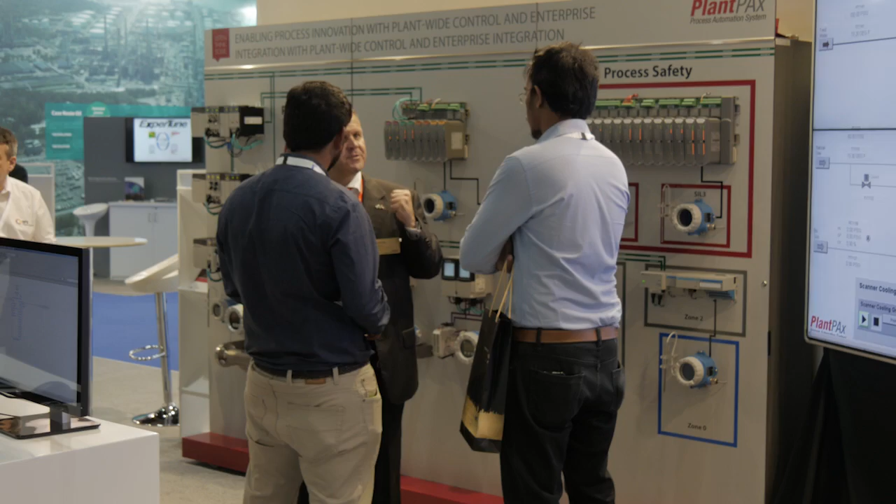The reason that we're here is because we have world-leading control and safety solution products integrated into solutions to deliver to the oil and gas base across the Middle East. What I'd like to talk about very briefly is our solutions capability using Rockwell Automation's products and services.

If we look through a typical project life cycle, every project starts with a concept, an initial specification, front-end engineering design, and then through to traditional systems delivery that Rockwell Automation are very well known for. The thing that Rockwell Automation can do is we can add genuine value to the whole engineering life cycle, right from initial specification through to front-end engineering, to help get the specifications correct to deliver solid, reliable control and safety system solutions to meet our customers' requirements.

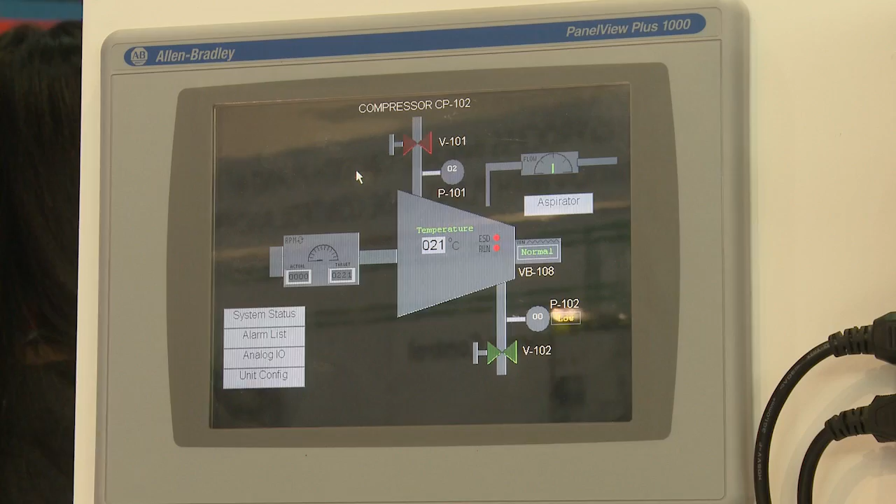On the show today, we're showing the AADvance safety process product. It's been shown as an application on a compressor, and it's been configured as a SIL3 fail-safe configuration, and it's showing an element of control on the compressor where we've got speed and flow of the fuel, with all the emergency shutdown systems being triggered in if anything goes wrong.

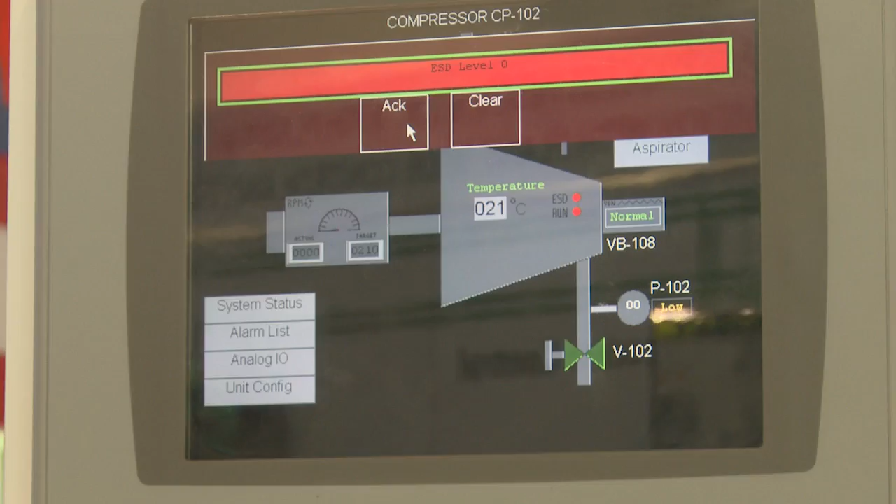Now, the Trusted product, as you'll see, is a larger footprint product. It has a good IO density level, but it is designed as functional safety level SIL3, actually the highest safety level that you can get in the oil and gas industry typically. And its key design feature is that it operates in a triple modular redundant mode, so it has both availability and reliability of application.

It has features such as hot swappable I/O modules, so if you do get a failure, then you can repair any I/O module in the field without having to shut your plant down. And those are some of the things that really make this product a class-leading triple modular redundant system. But it also talks over a high-integrity communications network to AADvance, James.

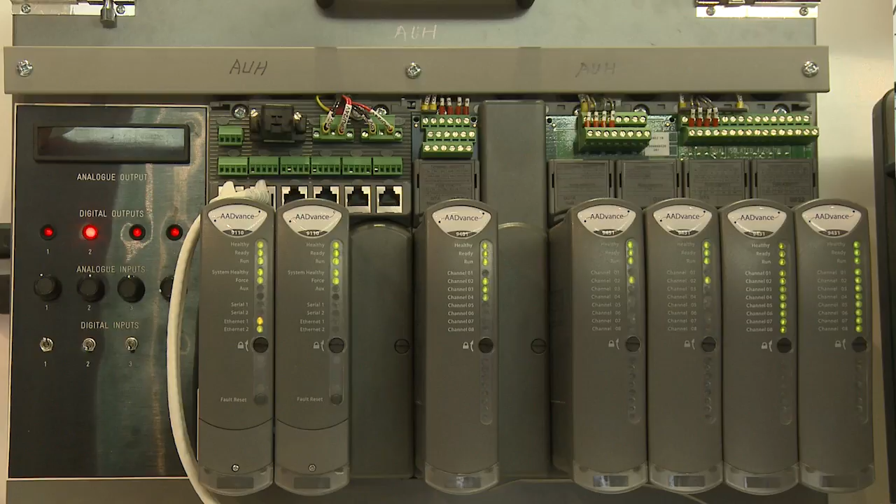AADvance is a scalable design system. It is able to be configured for safety integrity level 1 up to safety integrity level 3. So we have the flexibility here to put in additional modules to get the triplicated module redundant configuration, and in this particular one we're showing it on a gas compressor application where there's integrated control and the emergency shutdown safety.

Here we're showing two processors. It's designed as a SIL3, but fault tolerance can only be achieved if we put a third processor. So this one is configured as fail-safe. If a module had to fail, the remaining processor would take the actions and shut down safely. That's really the configuration difference. And on this here, we're showing the parameter setups that we have on the display, the HMI, where we're showing integrated.

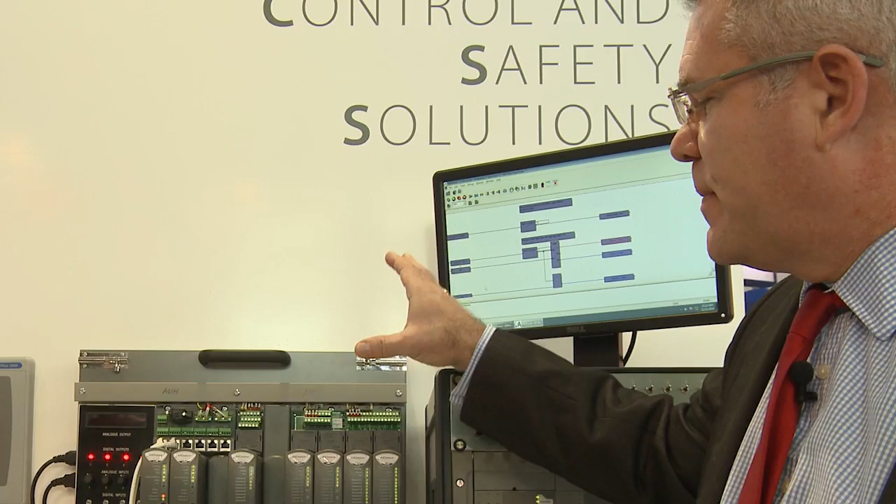We can show the RPM, and I can adjust these, and we can see this in the compressor coding that we have on the processor. So I can see that the target RPM has been monitored and it's been tracked. And if I can adjust it, we can see it all going up, including what is the flow. We can show temperature. The AADvance is working in a high availability process control configuration, if you will, with the

functional safety elements. And going back to Trusted, Trusted is designed around, for example, large fire and gas system applications on large offshore platforms or onshore installations and emergency shutdown applications. So this is where this really comes into its fore, whereas the AADvance, as James has said, it's scalable in its functional safety capability from SIL 1, which is the least rigorous level of functional safety, as James said, up

to SIL 3. Now, clearly what we can do with these is we can distribute these around the plant, which does give you some local cable connectivity advantages, and then you are able to network the safety elements across the systems up to the Trusted, if that's the application that you have. So I think in closing, we have good, scalable, flexible, large and small integrated control and safety solutions products to meet the oil and gas industry needs.

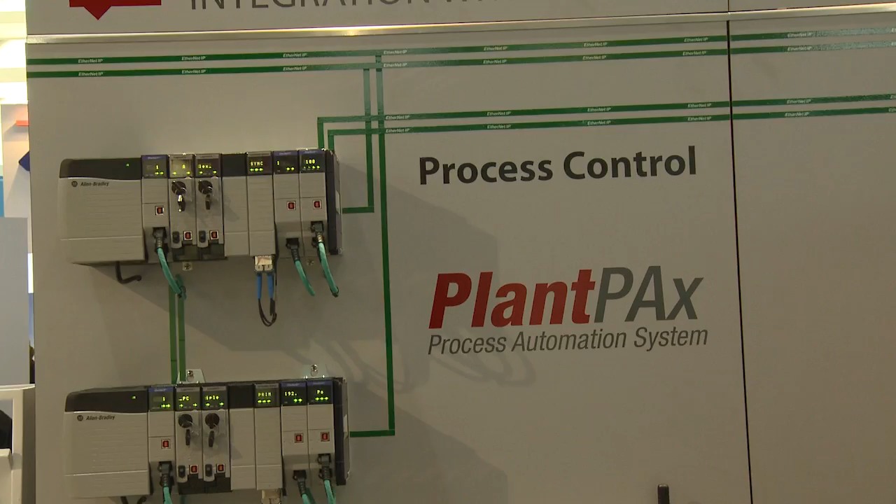I'm here with Gert Thoonen, and we're going to talk a little bit about our PlantPAx system, our DCS, the modern DCS. Here, for example, you have simplex I/O ControlLogix-based systems with representative field I/O. You have high availability I/O using our 1715 I/O series, and then further moving over, we have our process safety solution, the AADvance, which we talked a little bit about elsewhere in this discussion.

Here we are showing our redundant ControlLogix, our basic process control system. We can have it as a duplex or a simplex controller. We can make it in the system like we want to have. And below we are integrating all our field devices, the eyes of our installations in the field. So like everybody knows, the good old 4-20 milliamps, what is HART connection. Modern devices, they're going already on EtherNet/IP because we get a lot of information from them. WirelessHART, the newer technologies. Foundation Fieldbus, what is mostly used in our oil fields today.

When we're talking about the PlantPAx solution, the products that we have here, these are products that can be embedded into unit control panels and panels that are supplied by third parties. So when we're actually supplying an integrated control and safety solution, we're actually looking at an ICSS that can extend beyond our traditional scope of supply right into the packages, and the connectivity, because it's all Rockwell products, makes itself a distinct advantage to the end users.

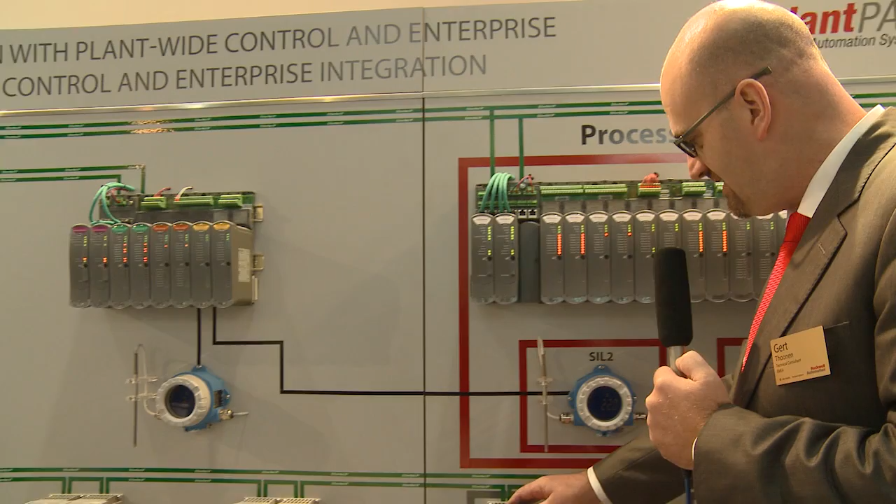Yes, I fully agree with that. The nice thing about this PlantPAx solution is that it is fully integrated. We can integrate the smaller skids and select the right controller to integrate everything and get all the information in one single system. So if we go on here on the wall, we see also the integration of frequency drives in our system, and as we can see, everything is connected on a ring network, an EtherNet/IP, so that makes it easy. Everybody understands the Ethernet. We need only one single network to connect everything in a secure way.

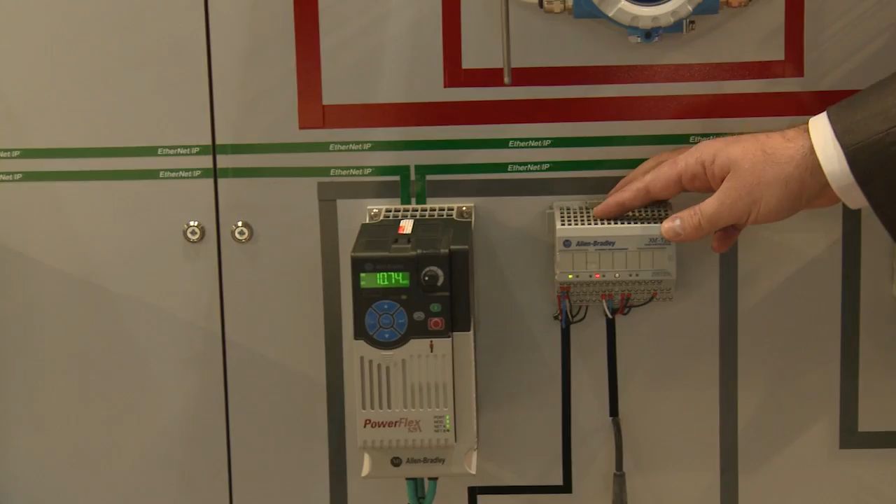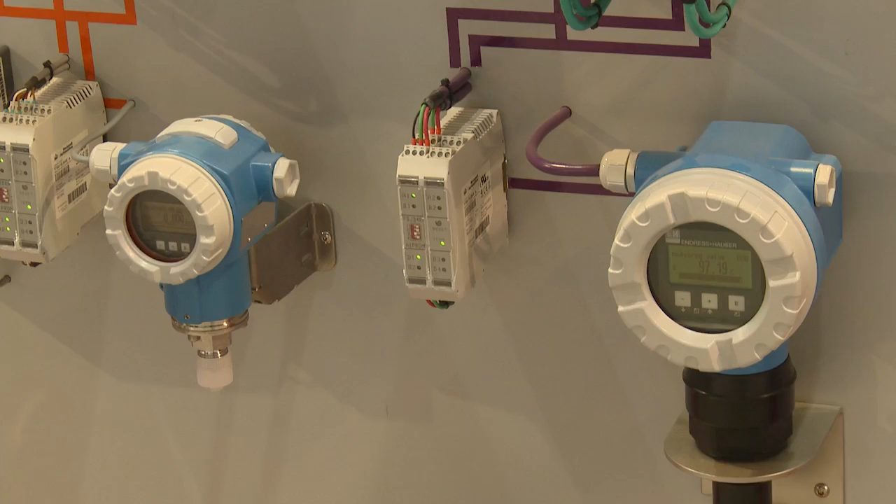And of course, when we start to talk about pumps and big fans, we need to be able to do vibration monitoring, and with our system we can bring the vibration monitoring modules near to our end device and pump the data up to our integrated system to get all the information. In our oil fields we get hazardous areas, so we go intrinsically safe to reduce the power in the field, so that there are no sparks coming up. And as top of the range, our standalone safety integrated system that works completely separately, but will give all the information to the basic process control system and acts as one platform to get all the information.

Our clients demand that the safety elements are segregated, functionally segregated from the control piece. This then meets with the industry standards and industry requirements, maintains segregation, but also importantly maintains the overall integration for the information that is available to the operators, and also in the programming environment as well, in the engineering workstation

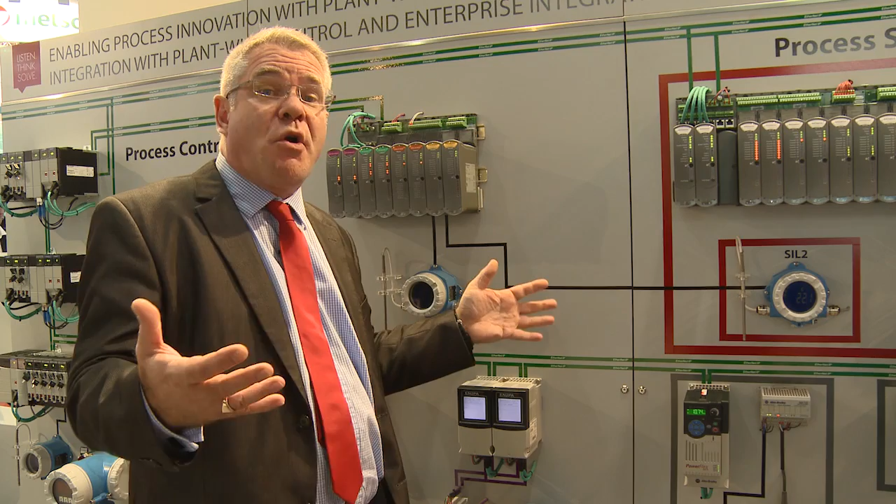environment. The data is going up to our operator, to our control center, and also from the basic controller everything is going up to get it in one single place and get the information in one single screen. What is very important is that we can make the right decisions about what is going on in the plant.

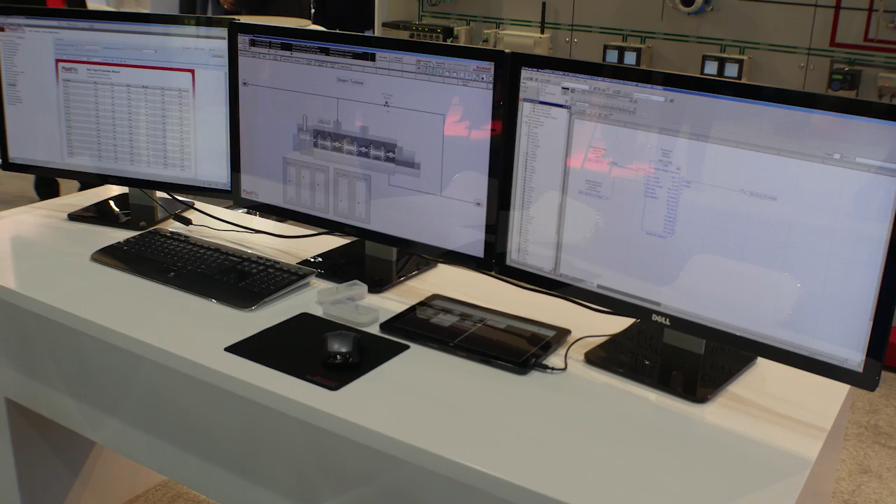Welcome to my control room. As you can see, we are jumping here into our oil and gas field processing. Our PlantPAx is the modern DCS system that is using all modern technologies like virtualization, integrated safety and network security as a standard best practice in our solution.

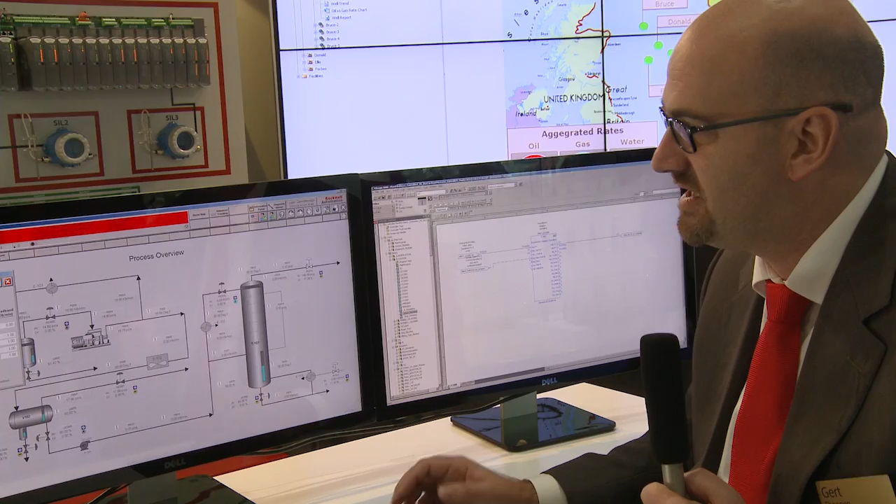PlantPAx is easy to integrate because it has a full range and extensive library with a lot of integration in faceplates, like we can see here on this screen. This is coming from our basic process controller, and it gives all the information for the operator, for the maintenance guy, where he can configure his alarming. The engineering department can configure everything in one single screen to get it up and running.

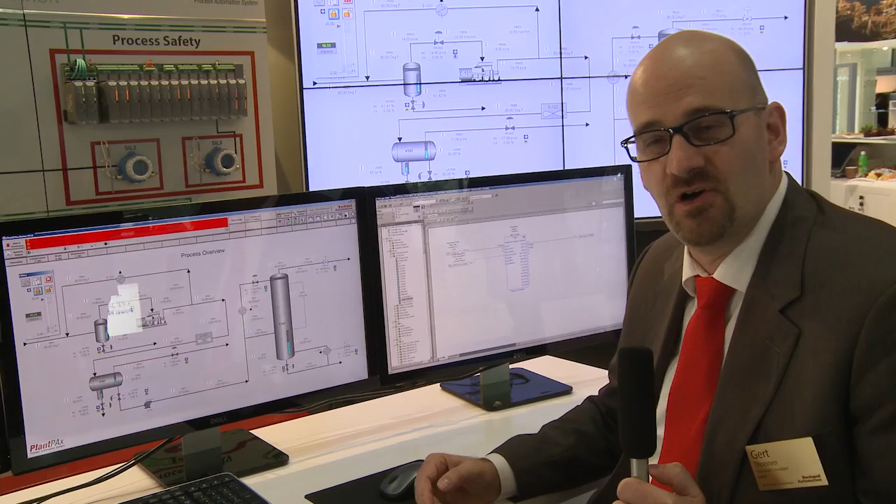But as we said before, the safety system is also fully integrated and has the same look and feel. Here you can see the little eye to tell you that it is coming from the safety part. But the most important thing is that we also get all the information in our reporting system, and in PlantPAx that is very easily done.

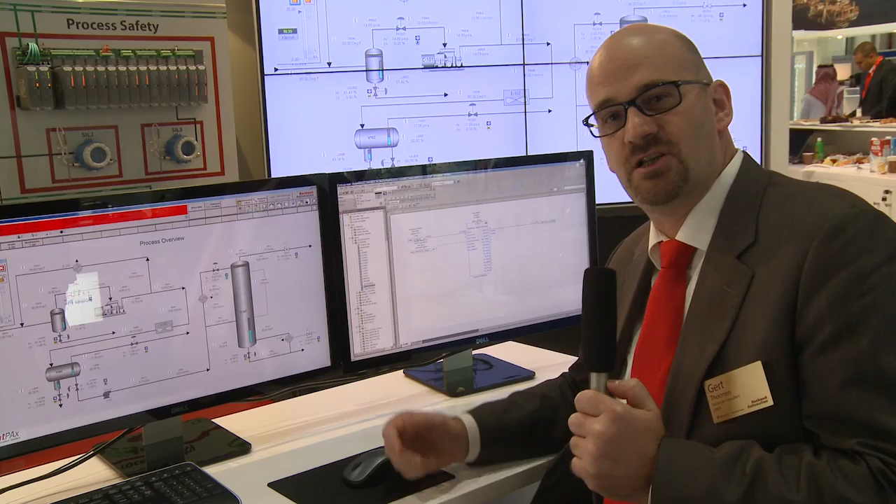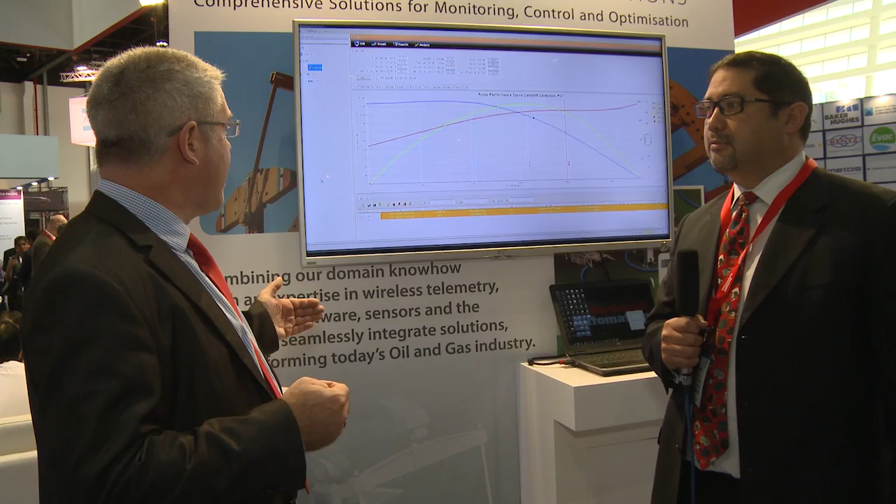I'm here with Thony Brito of vMonitor, Digital Oil Field Solutions, a recently acquired company that has joined the Rockwell Automation Oil and Gas portfolio of solutions. vMonitor have an excellent range of wireless telemetry, wireless hardware and digital oil field solutions that very well complement the Rockwell Automation Oil and Gas portfolio.

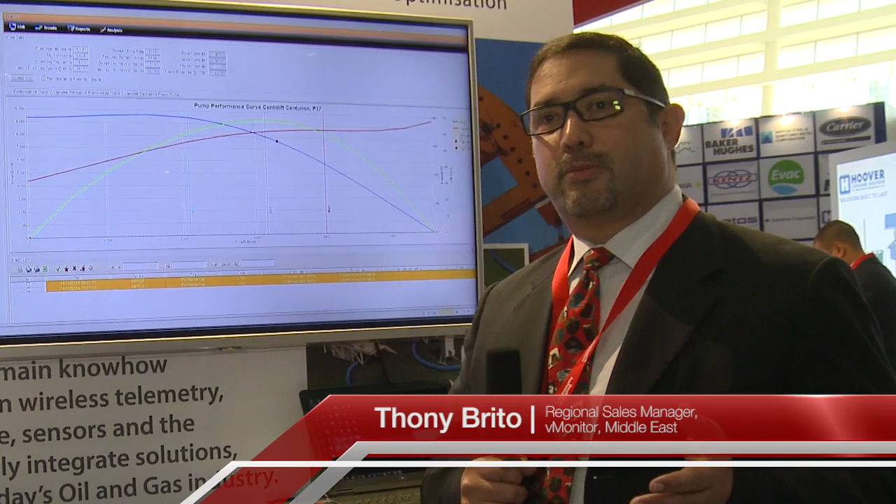The main function of vMonitor is to make sure that the customers can obtain the data, bring the data from all the wellheads and remote facilities all the way to the control rooms. So in vMonitor, what mainly happens is that we have designed solutions for wellheads, data acquisition systems, instrumentation, controllers that gather this data wirelessly to a concentrator.

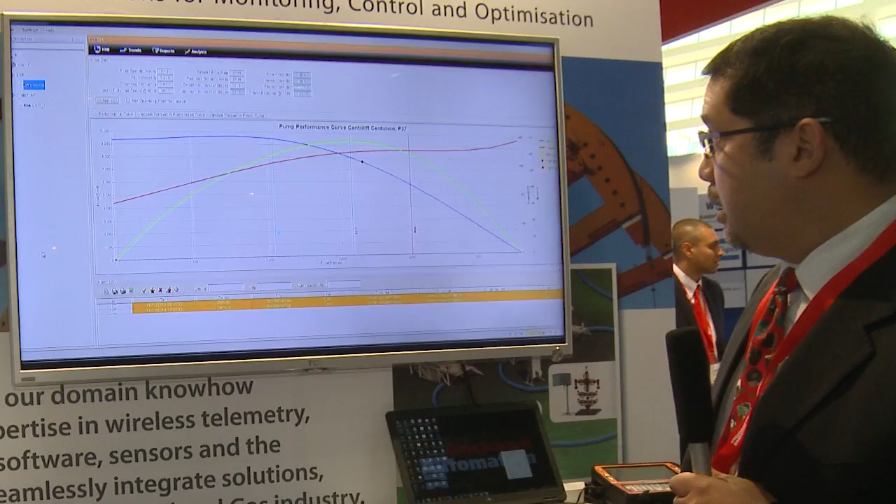And from this concentrator, we can either show local information or analyze this information, produce some technical data that can help the guy make the decision right there in the field, and then send the data to a control room, to something like this that we have on the screen at this point. So we have the wireless instrumentation, we have the gateways and controllers remotely that can be operated with an order from the control room located hundreds of kilometers away.

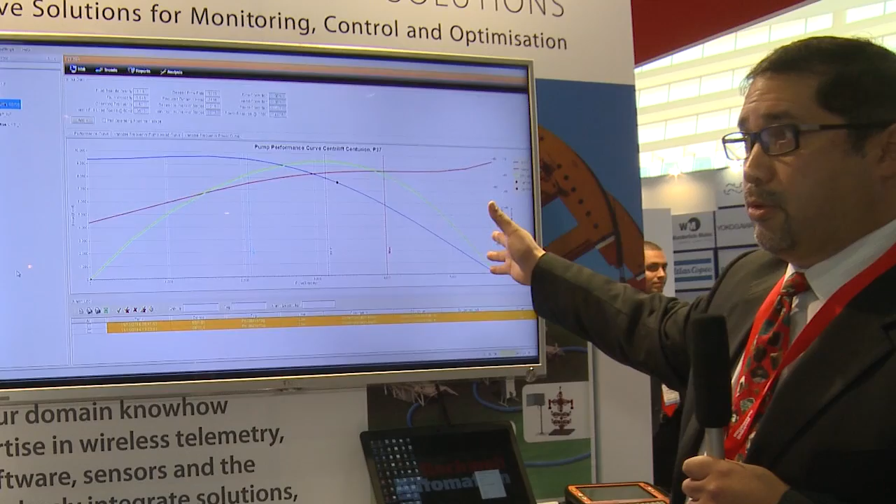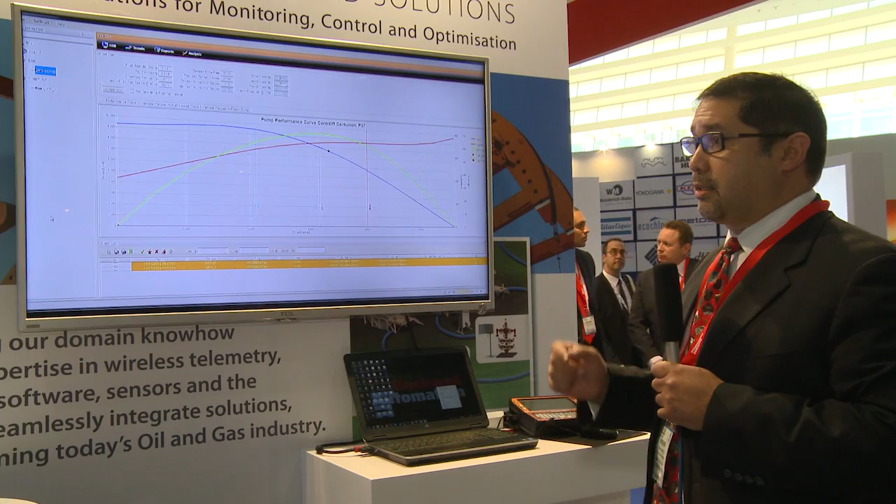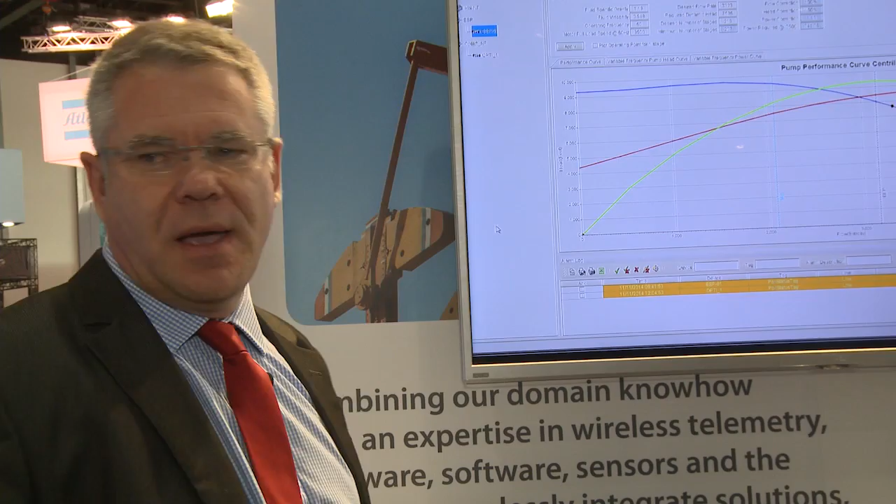And then we have the software tools that will allow you to display the information, see the data in real time, analyze it and then make decisions. We have an end-to-end solution that we can offer to the end user, and he doesn't have to go shopping around and trying to resolve the problem on his own. We will help them solve the problem. And this is why the acquisition of vMonitor fits very well with the portfolio.

We are a solutions business. Whilst we've talked very much about our products, you know, through from PlantPAx and AADvance and Trusted and so on, it's the way we integrate those and it's the way we deliver our solutions to our customers that makes the difference. So this is why it's a good fit.